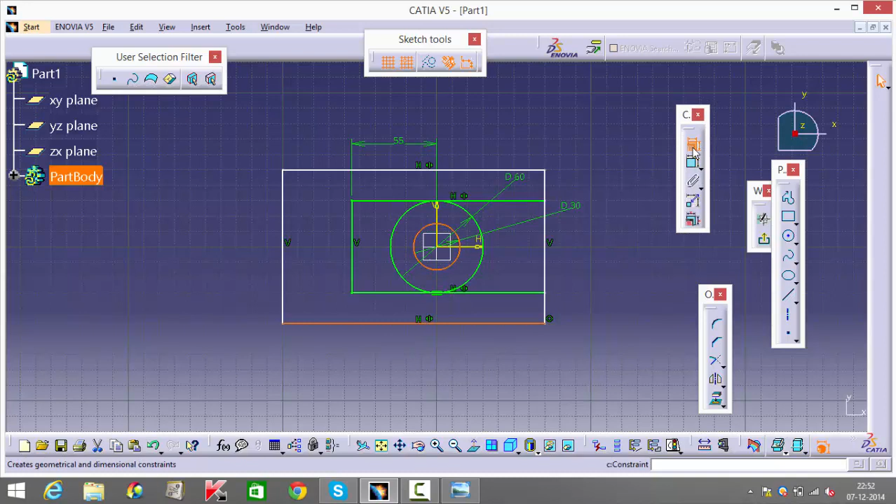Again, make both these lines symmetric with this, and now make it coincident to this -- I mean tangency to show tangency to that. Now I'm just going to trim the rest. Okay, and it's good.

So I'm going to go to my trimmer. I'm going to trim out all these portions. Okay, wait, hold on. Can you see it taking shape? Can you see this fork forming up?

Okay, now after this, what I'll do is I'll just draw another rectangle also and select that. Wait, I'll remove this -- that thing became constrained automatically, so that's why I deleted it.

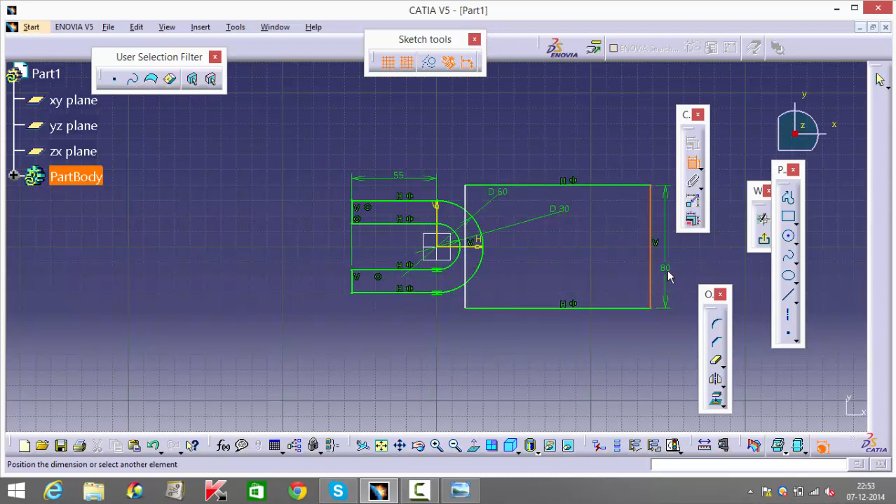Okay, so I'm just going to make that symmetric again, and I'll mention this distance as 30, because the breadth is given to me as 30, and this total length from here to here is given as 125, but I know that remaining portion is 25, so that means from here till the end will be 150, because 125 plus 25.

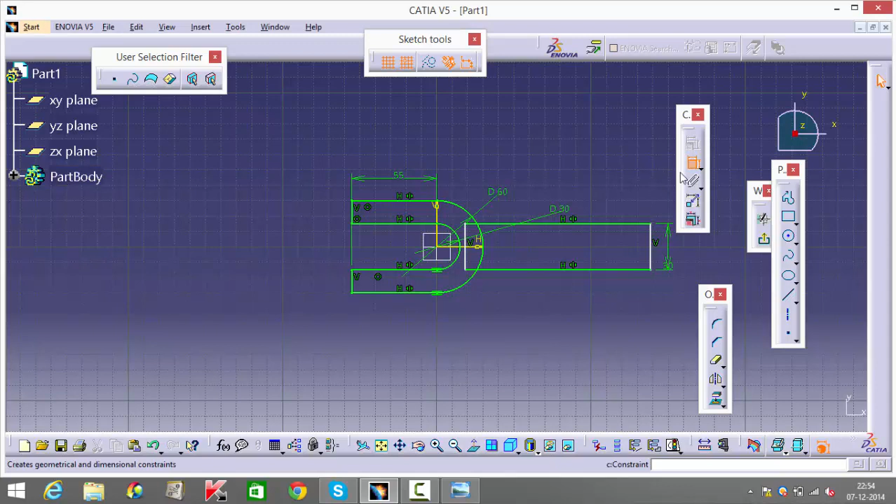But where are you going to position this? You need to put it -- it doesn't matter, because you're going to edge fillet this anyways. Put it somewhere inside over here and just trim off this extra portion. Okay, wait, first we'll give this distance. Select this end and that, and give it as 150.

Okay, now just push this back a little bit. Yeah, that should be fine. Okay, now you're going to go back. Oh wait, if we right now pad, it's going to say it's not possible because this is right now two separate bodies. You have to make it one single body.

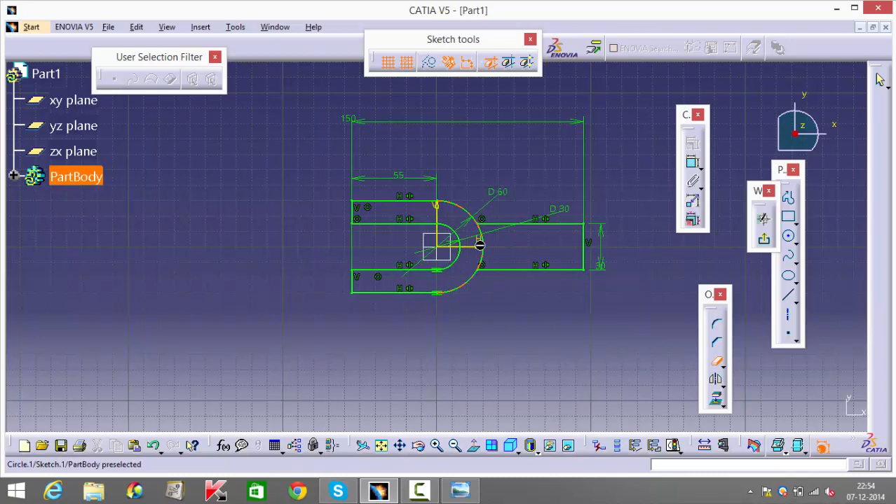So you're going to trim out this portion as well, this portion, and this. Yeah, now that's what you should eventually get. So this is what we want. Now we're going to pad the extent.

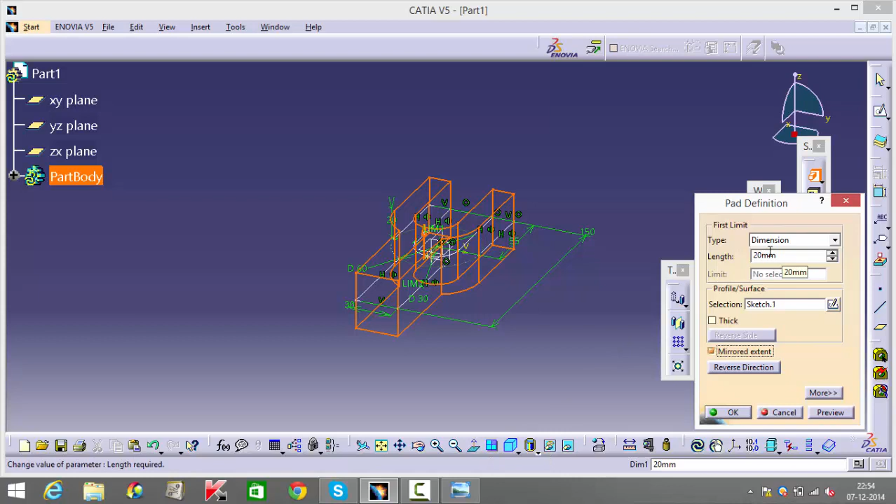You're going to pad this for -- one sec, let me just check. Okay, 30 itself. So since I'm giving mirrored extent, I'm going to give this for 15. Okay, so this is what we get.

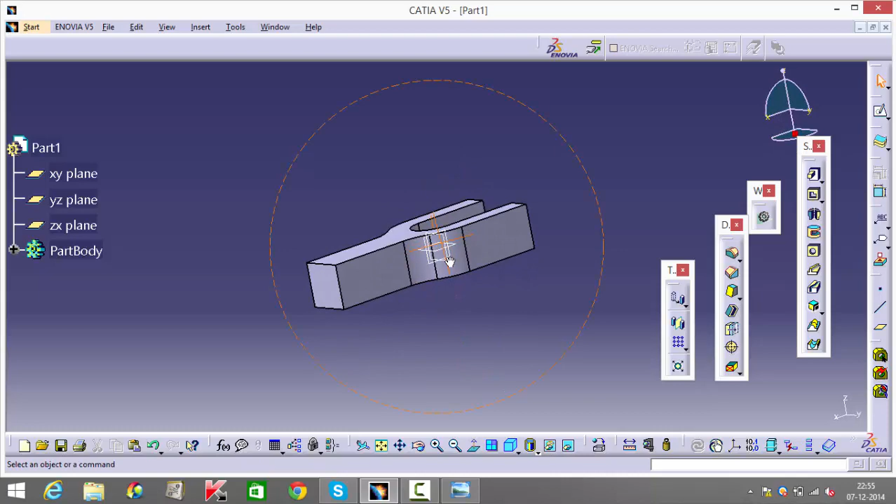Now over here, and over here, I'm going to give an edge fillet of 24 radius based on my textbook. So that's how it's taking shape.

Now I'm going to make this portion, okay, the circular thing. Now in my textbook I have an extra portion that's protruding outward. For that extra portion, I'm going to select this inner surface and go into pad. Now I'll draw my circle, give the diameter as 50.

Make this point coincident with that. Okay, it is coincident, and I'm not going to mention the distance, but I know for a fact that this distance is given to me as 30.

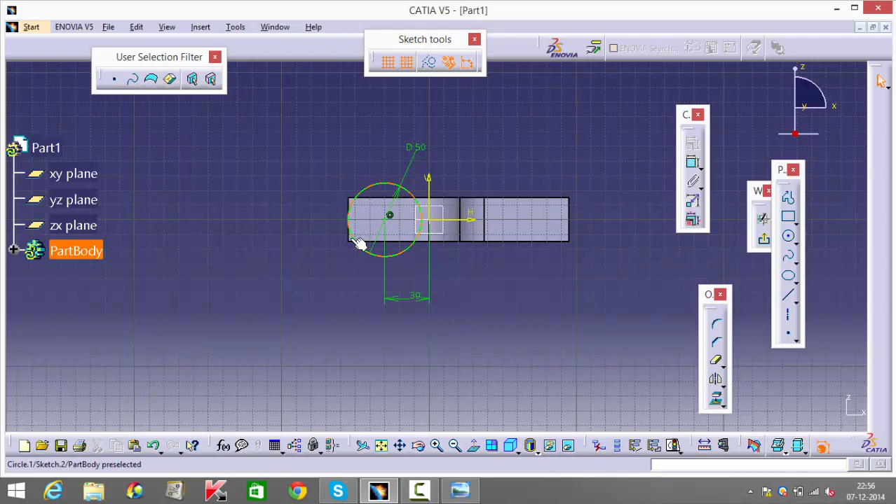Now I forgot to mention this earlier. If you pad right now, you're going to get an extra portion, but your figure doesn't look like that, does it? It's a proper circle. So let's first finish this pad, and then I'll show you what I mean.

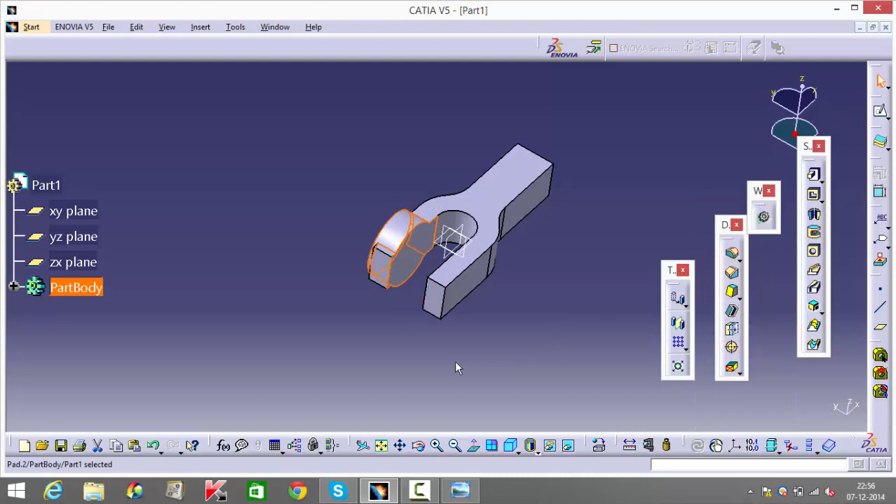So if I pad this now, I'm going to reverse the direction because I wanted to go that way, and give 17.5. Now see, this extra portion is what we shouldn't be getting.

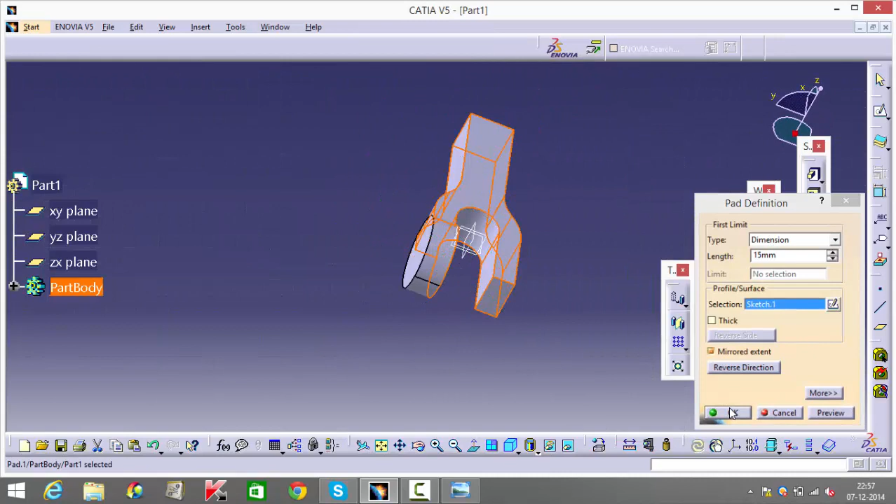So what you could do is go into your sketcher and change this distance. Don't make this 55, make it like 45 or something. So when I go back and press OK, now it's gone in, because now it's okay. You can see a few dots, but it doesn't matter. You can just change the dimensions accordingly.

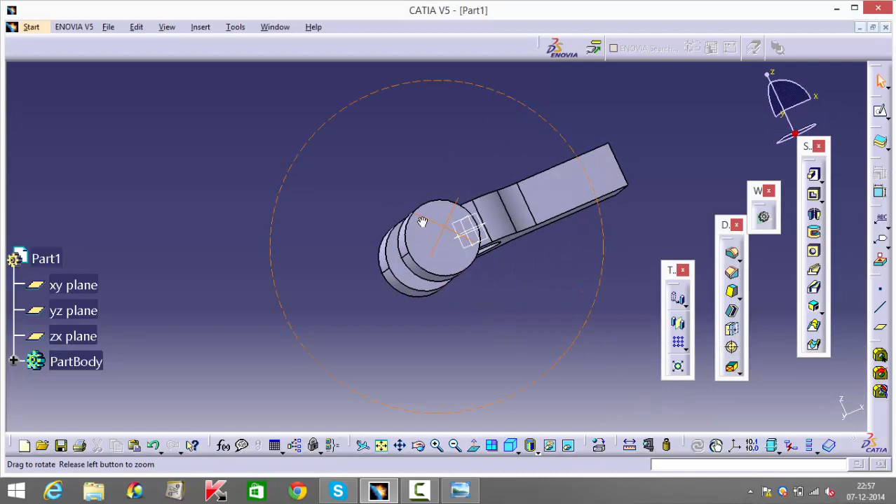Now what I'm going to do is make this symmetric. I'll select this plane and get it there, and you're almost done with the first part. I'll select this and this, and give an edge fillet of 24 again, as mentioned in the textbook. There we go.

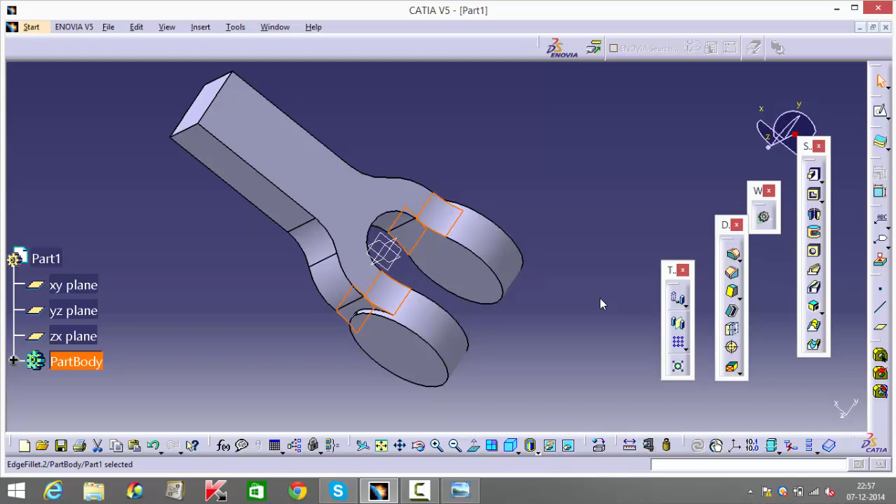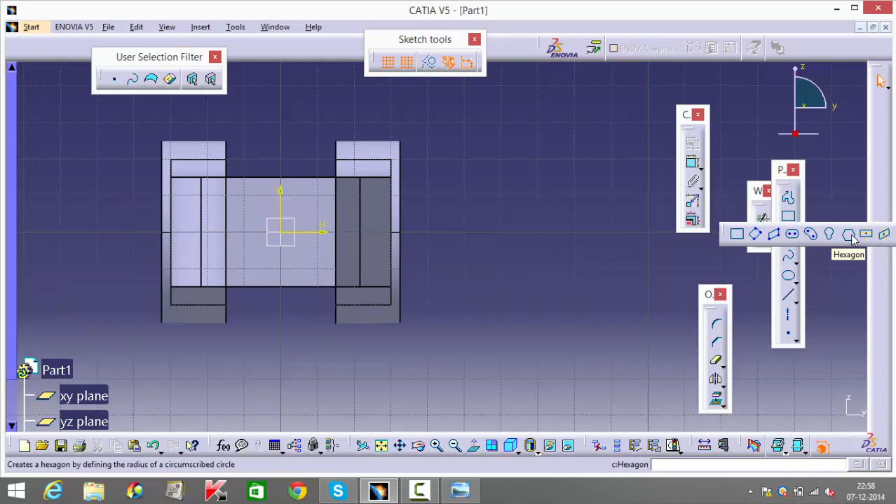Now to finish this part off, there has to be a hole that comes there, and we have to draw an octagon over here. I figured out an easy way to draw an octagon by using a predefined function, which is the hexagon. So you can start off by drawing a hexagon directly, upward. It doesn't matter, we'll mention the dimensions later.

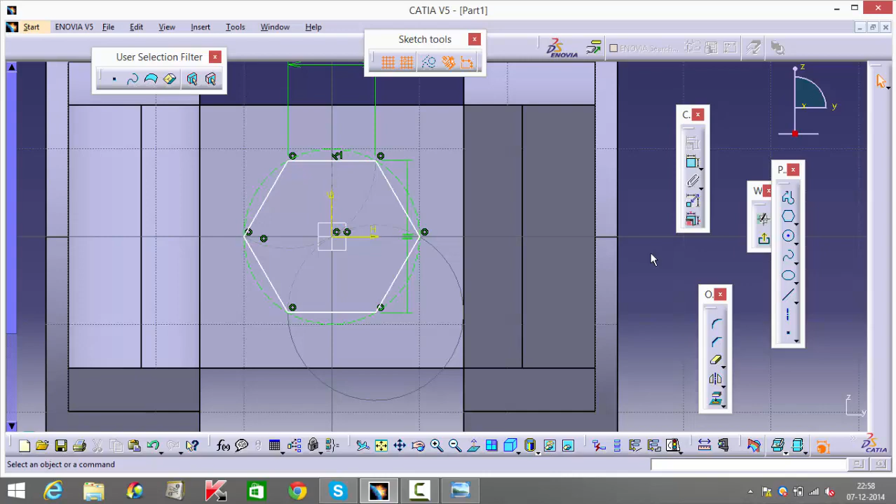I'm going to make this 10. It automatically constrains itself. Now if you notice, it's moving like this, so we'll have to fix that. Okay, but wait, we'll first... okay, don't mention this as 10.

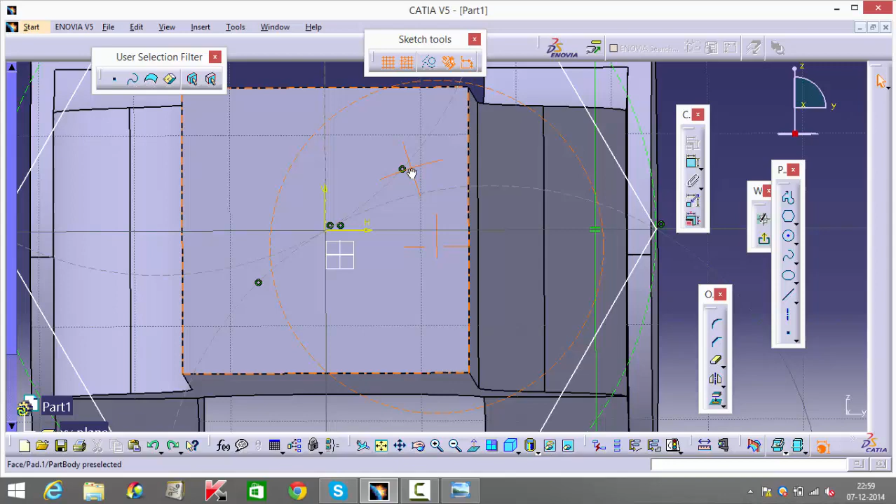What you do is take a straight line and first start off by drawing a straight line. Draw it big, it's not a problem, we'll fix it later. So I'm just going to draw a straight line like that, drawing it in such a way that it cuts the corners.

So I'm just going to mirror this with respect to this plane. Now I'll get my trimmer tool. What I'm going to trim is this portion, I'll trim these edges. And you're getting your octagon. It's as simple as that.

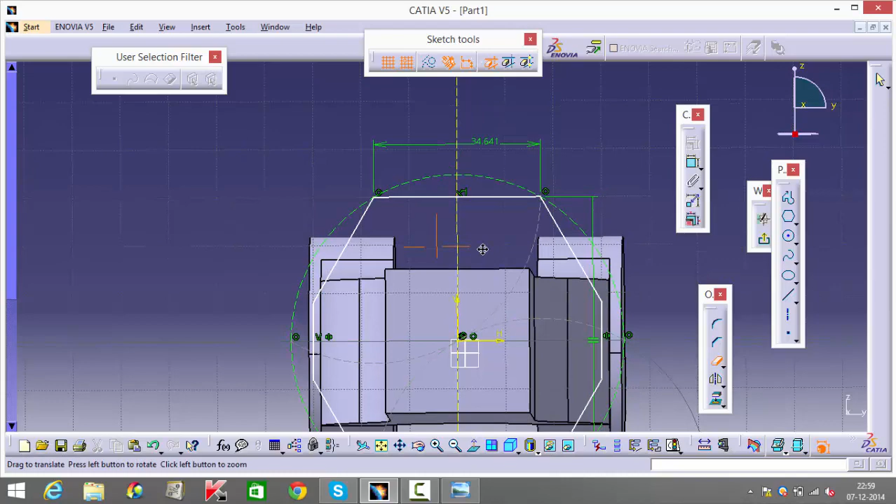Now you have to remember this: if I mention these dimensions right now, it will go in a way we don't want. So what you can first do is make both these points symmetric to this axis, so when we give this measurement, it distributes itself evenly. Do the same for the other side.

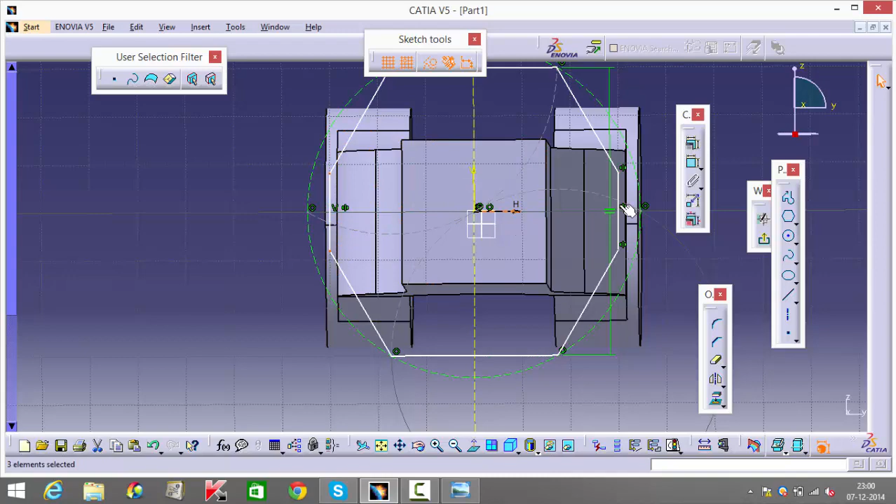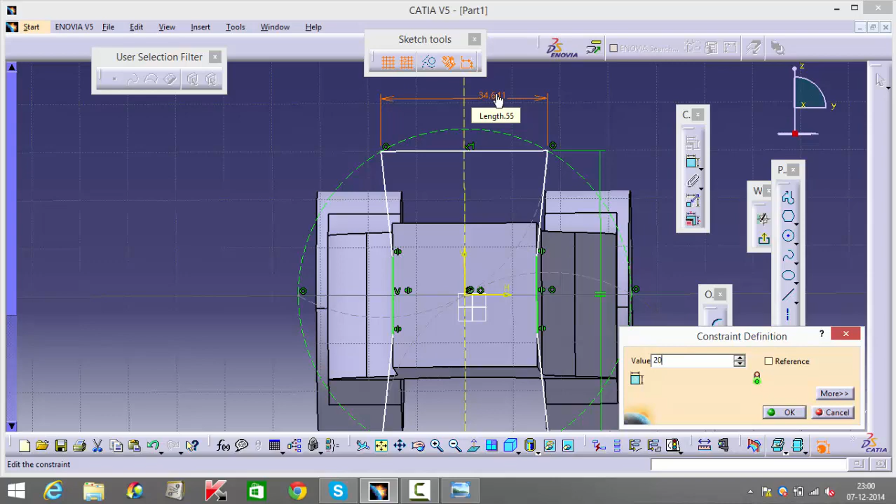And now what you can do is make one end coincident, and you can mention this as like 20, it doesn't matter. Now make the other end coincident. Okay wait... yeah, you don't need to mention that dimension, it's okay.

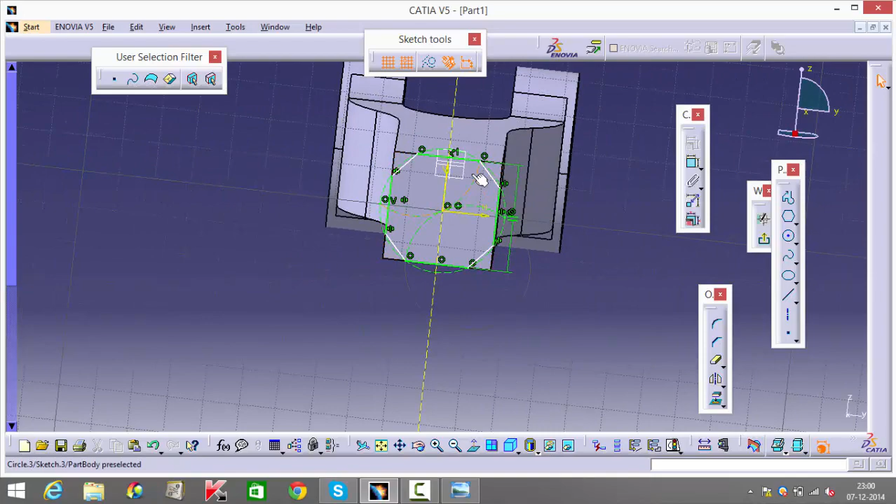What you can mention is how much you want this to be. I usually give 10, but it doesn't really matter. Whatever measurement you're giving, give the same for the other side.

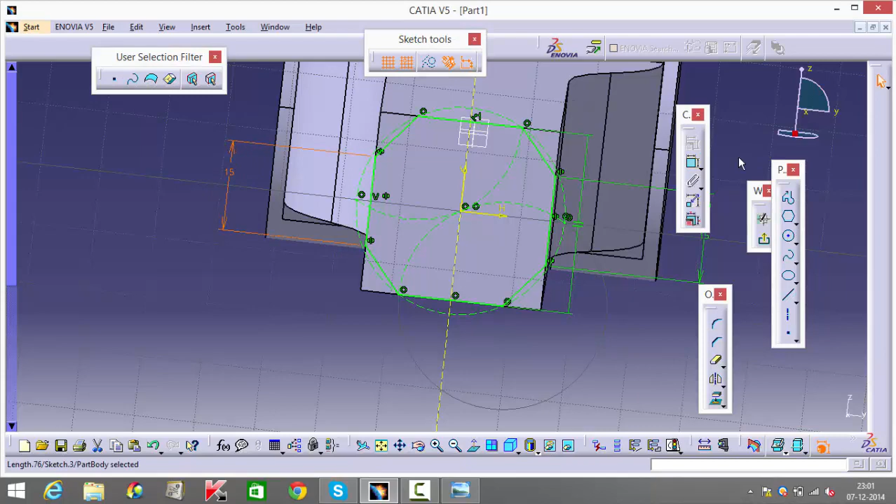Now you're going to pocket this. If you have to, reverse the side and pocket. In my textbook it's mentioned to pocket to 37.5, so I'll pocket to that. And you get this, this is what you want. So this is the first part done.

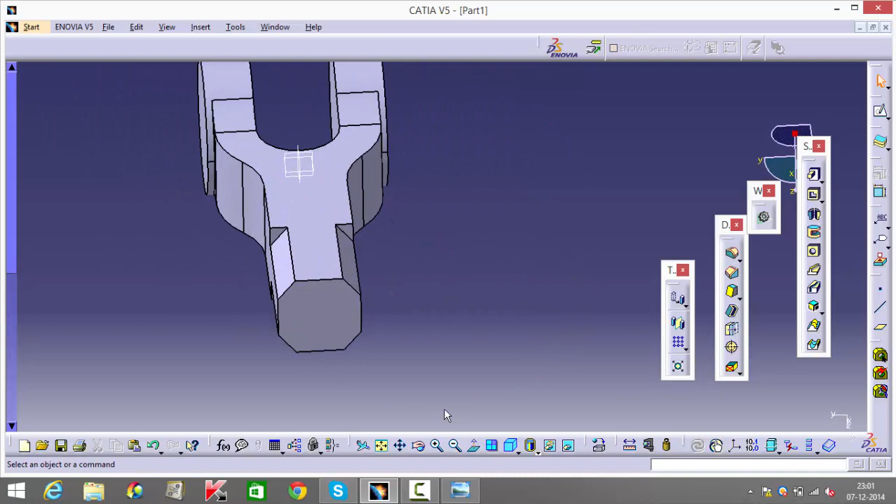30 minutes, okay, fine, we'll finish it. So I just go into my hole definition, make sure that's in the center.

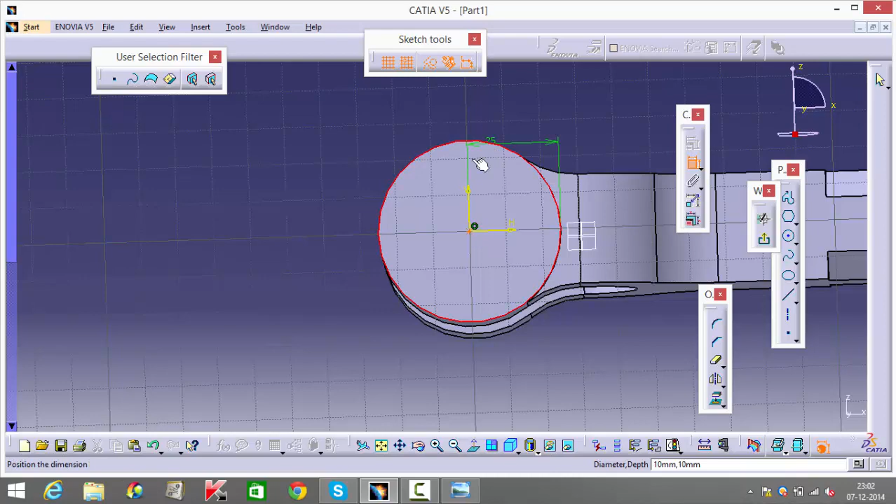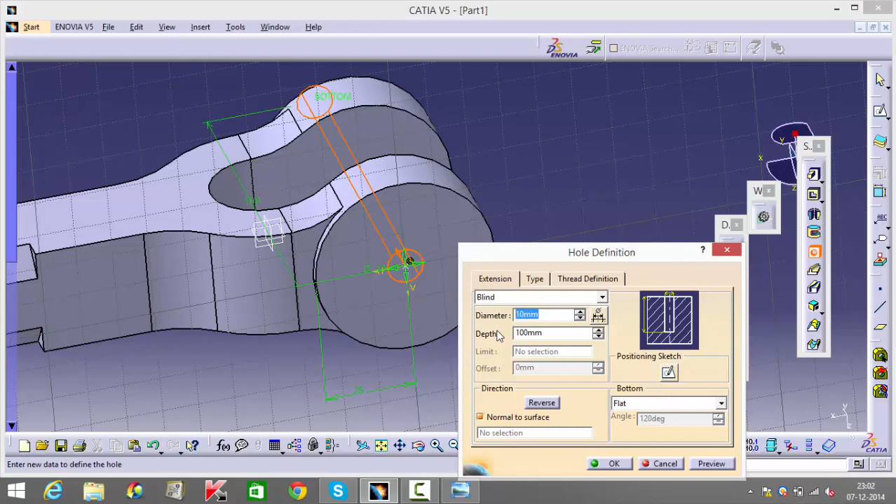Okay, and the pocket is for 25 as well. Depth 30. Okay, I'm just going to give 100 because I want it up till the end. And this is 25. So that's your finished knuckle joint part 1.

I'll start with the second part now. The second part is also very simple, it's plain. So what you can do is just draw this rectangle first. You'll be done with this in a few seconds, just draw a rectangle.

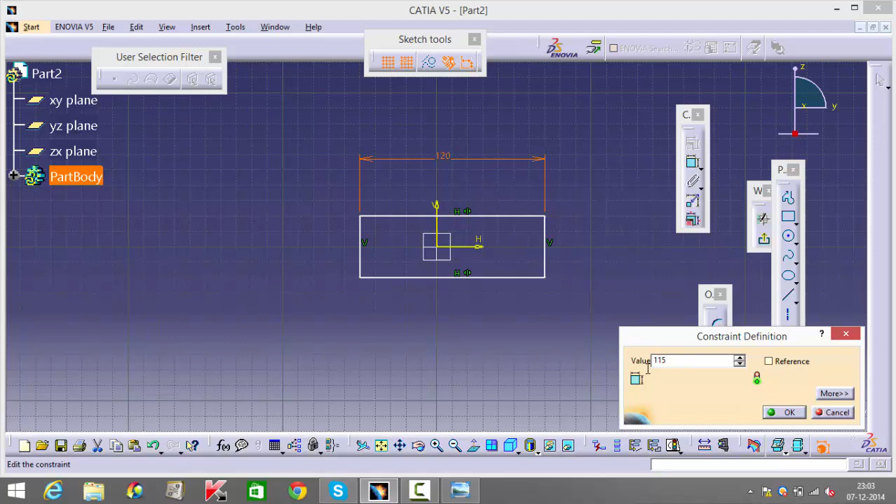So I'm going to give 115, and then I make again these two edges symmetric. Then this distance is mentioned to me as 30. Now I'm just going to exit my workbench and give a pad, again this pad is also mentioned as 30, so 15.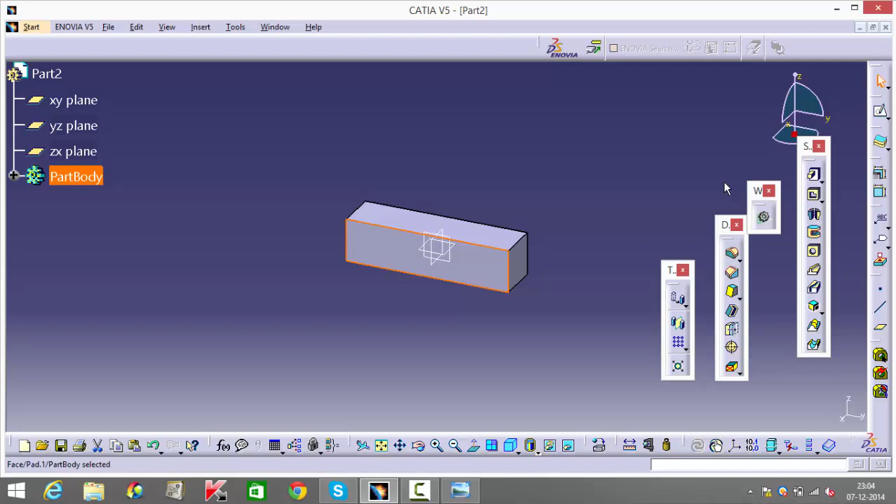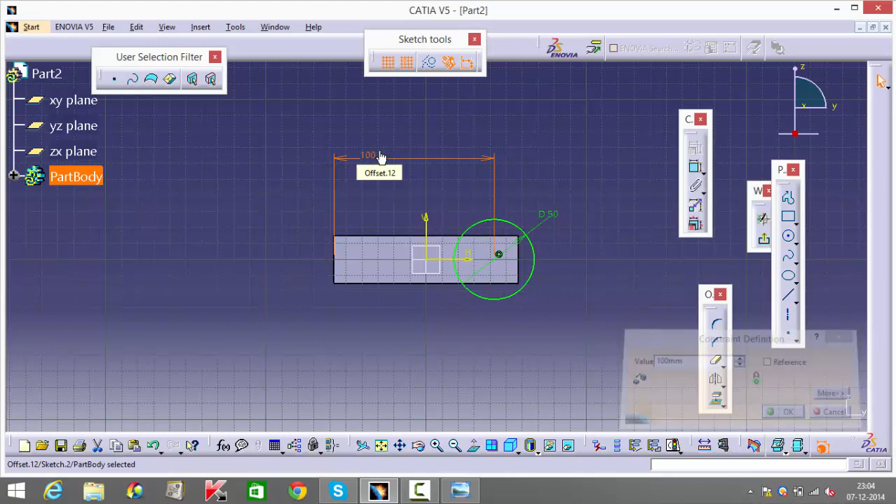Okay, now I'm just going to select this portion, and now I'll draw my circle. My circle distance is given as 50 at the diameter, and again, since the center to here is mentioned as 100. Now see, that extra portion lies within the circle, so when we pad this it's hidden. So I'll pad this, reverse the direction, pad for 30, and we'll get that.

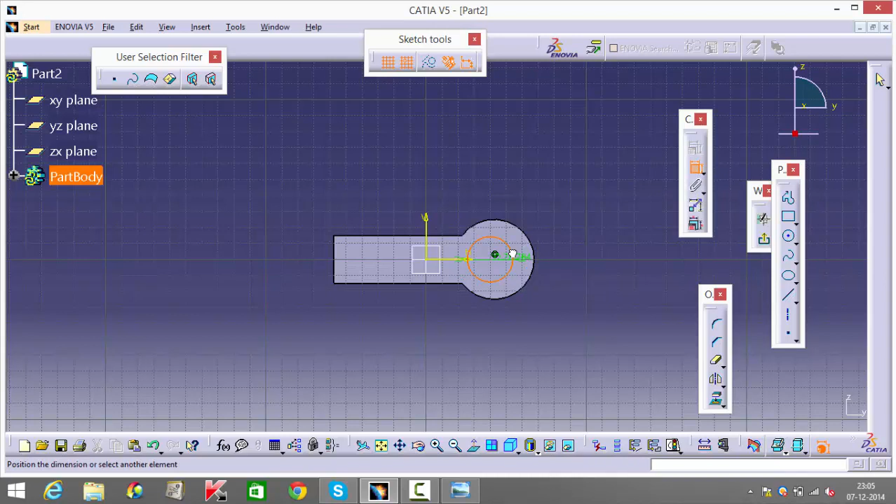Select that again, just make a circle for the hole, or you can go into your hole definition, it really doesn't matter. This is given as 25, and again this is mentioned as 100.

Again, I'll go back and pocket this, 30 or up to last, won't matter. Okay, we're almost done with this.

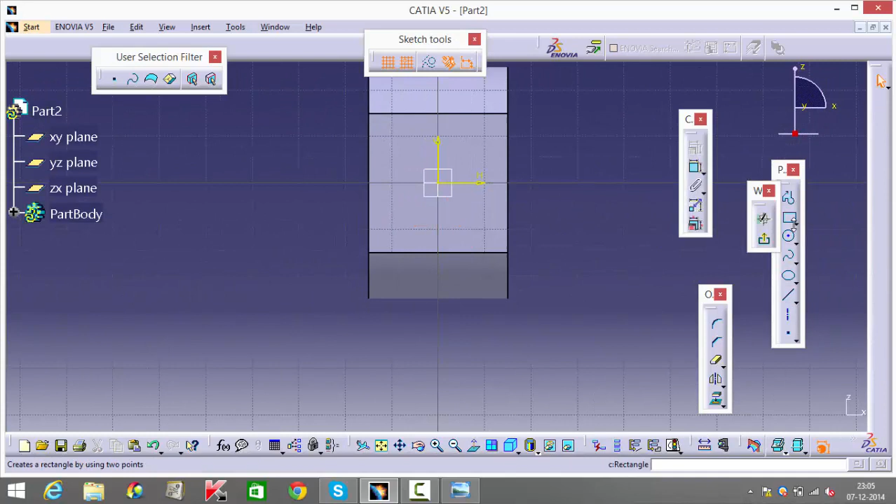Select the surface, and the same way how you made the octagon for the previous part, you'll do the same thing over here, just make it a little big. Then you draw these straight lines, you can just mirror this, and then go into your eraser tool and delete these edges.

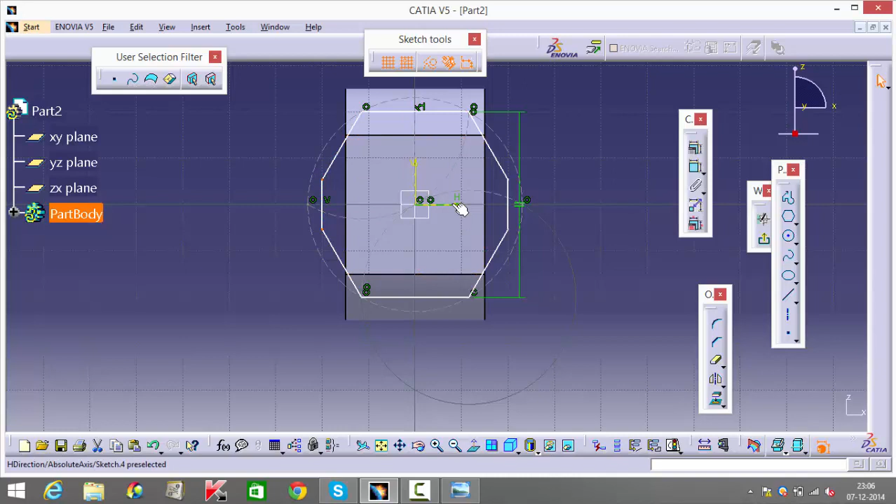Okay, then same procedure, make these symmetric. Similarly this as well.

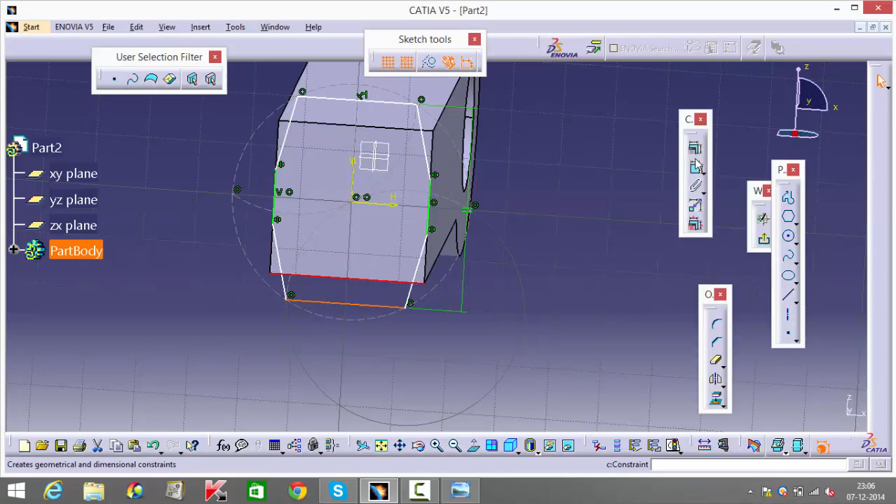Then you can start off by making one of these ends coincident. There you go.

Okay, and what's happening? Yeah, and then you can mention this as 15. Same thing you'll do for this side.

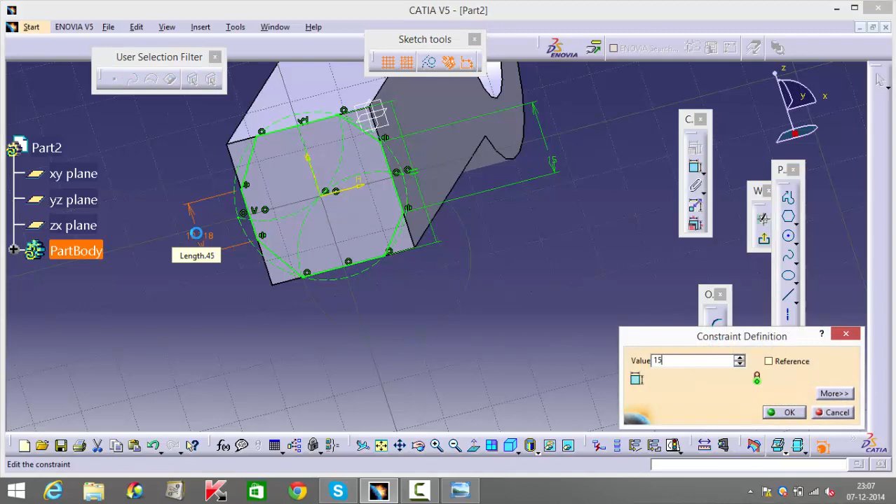Okay, and then you'll exit your workbench and again pocket this. Reverse side 37.5. Yeah, and there is your part 2.

Don't forget to give these edge fillets. I forgot to do it for the previous part. It's fine, make sure you don't forget to do it.

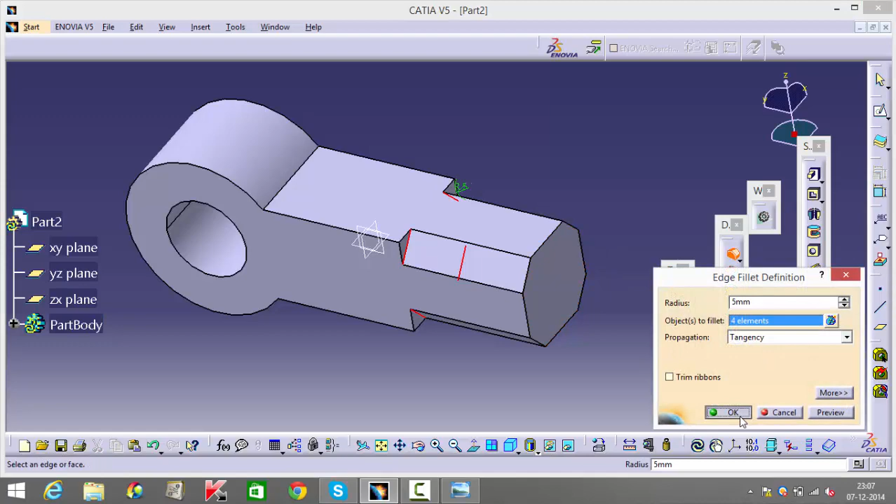And this, you can edge fillet this for 5. Okay wait, probably give like 2 or something, it's because this thing that I mentioned was too much, the hexagon that we drew.

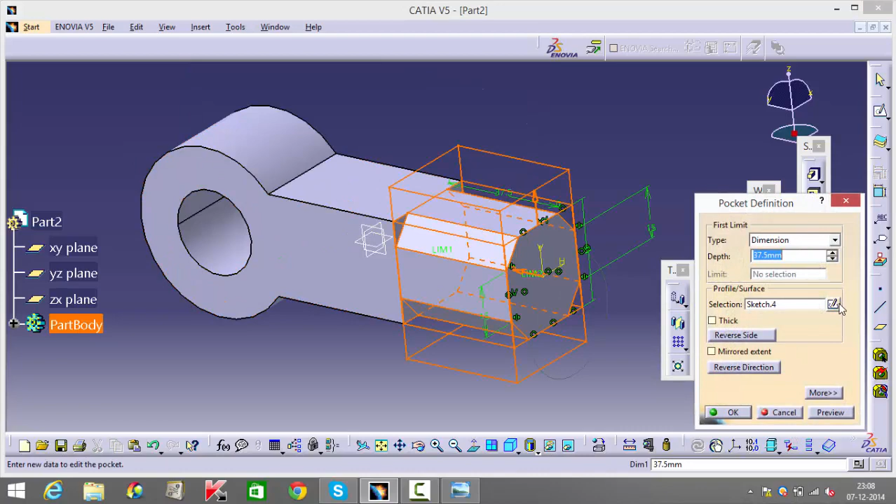So probably if I make this, whatever readings you give for this, make sure you give it the same to all. So now if I give, okay it just changes its orientation a bit. If I give 5 now, it'll be fine.

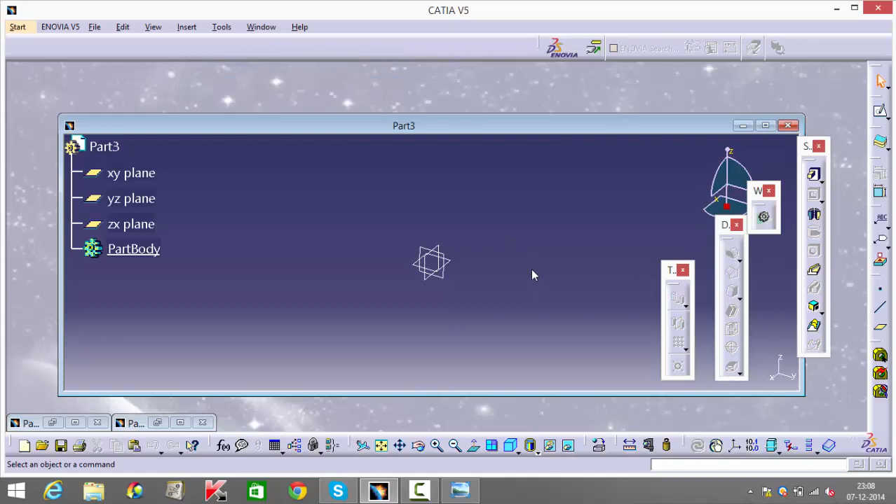Okay, so this is part 2, part 2 done. The rest is very simple. This is part 3 now, we're going to make this portion.

Okay, quickly. I'll just go into my... actually I don't need that, I can draw freehand, I can take the profile tool itself. I'll just make a shape like this.

And this total distance is given to me as 38, but since I'm going to shaft this, it's basically going to be half, so I'm giving 19.

Push this up a little bit. And this is given to me as 25, so okay, so it's a 25 dia, but since I'm doing shaft, it's going to be 12.5.

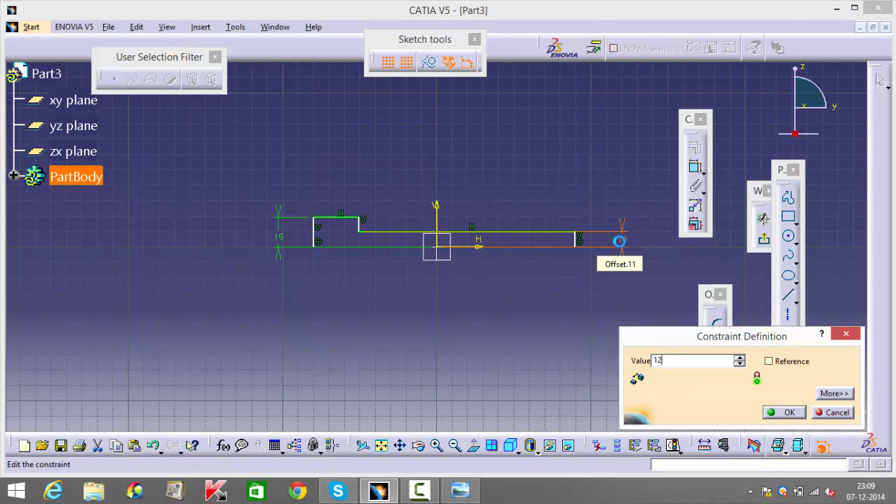And this distance is given to me as 10, and the rest is given to me as 82. So from here to here is 82.

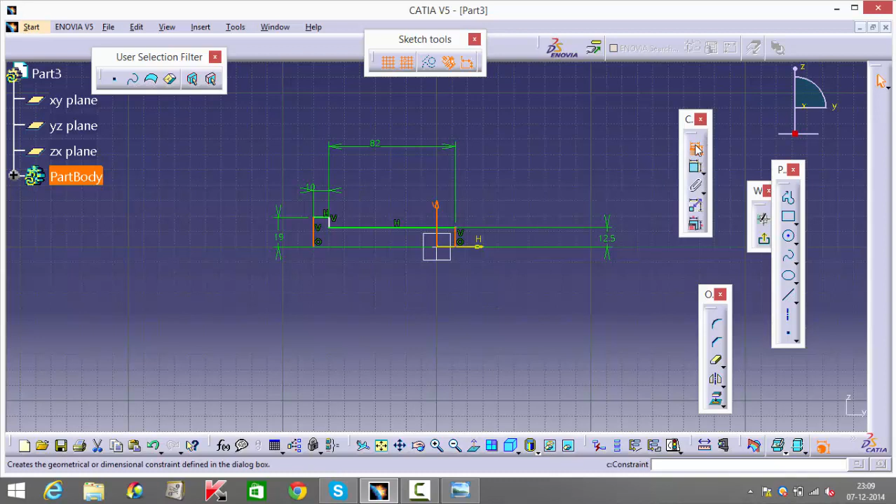Okay, now we're just going to make both these ends symmetric to this. It doesn't matter if you're very bothered about making your figure completely constrained, then you can proceed with that. Okay, then we're gonna just shaft this, and you'll get your bolt.

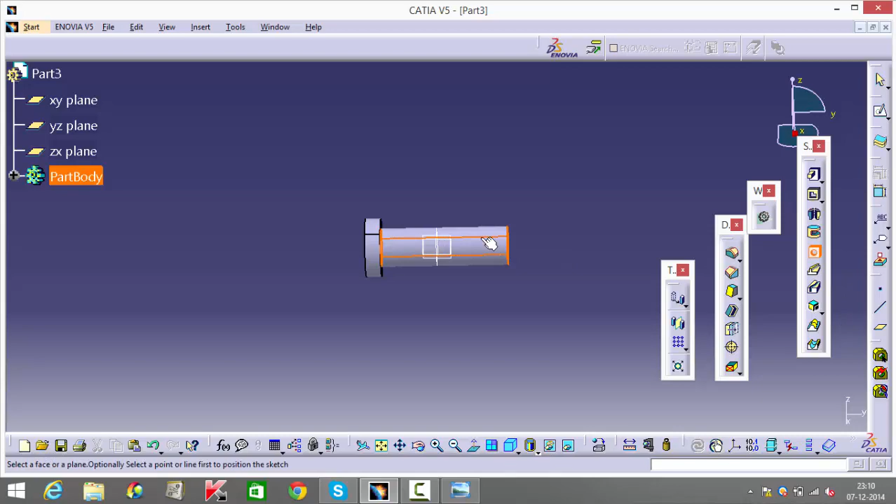You have to make a hole over here on this surface. You can either go into your hole tool and select the surface, or you can also select the plane and go into the sketch. So I'm just gonna constrain this hole.

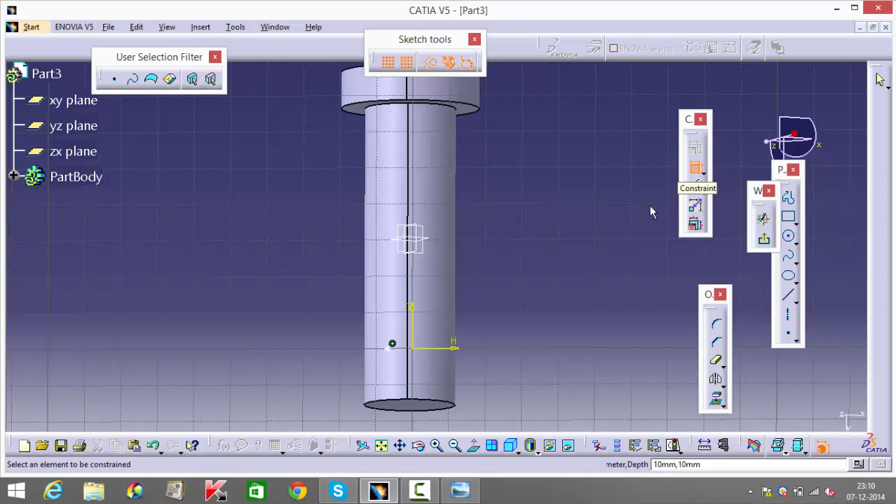I mean the hole itself, so I'll make it first coincident with that plane, and then I'm gonna give this distance as 11.5 as mentioned in my textbook.

I'm gonna go back, and the diameter is given as 5, and the depth you're gonna give it for 25 because it has to go all the way through, and that's it, so that's that part.

2 minutes, okay, and you have remaining 2 parts. We'll make the washer first. It's again very simple, select that surface and go into your sketcher.

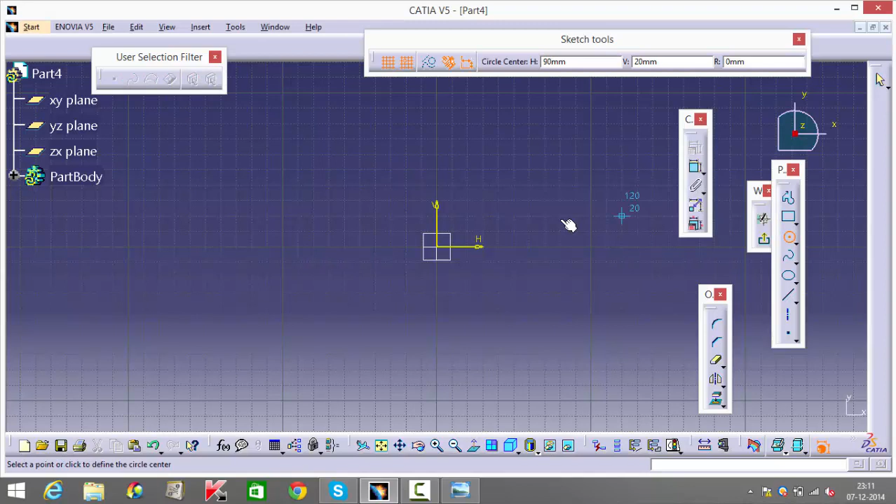It's basically 2 circles, that's it. You're gonna constrain this as 25 and then 38. 25 dia, 38 dia.

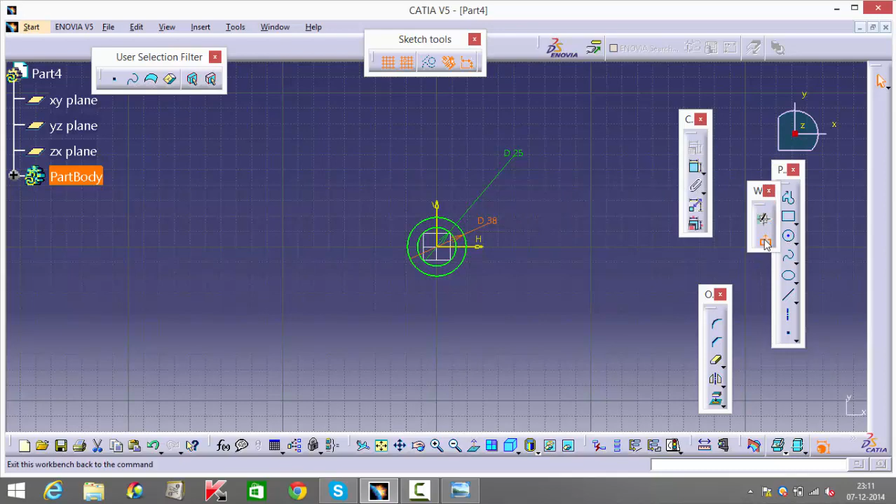And that's it, you can go back, pad, mirror. The total distance is given as 10, so 5. Again, over here you have a hole that goes through.

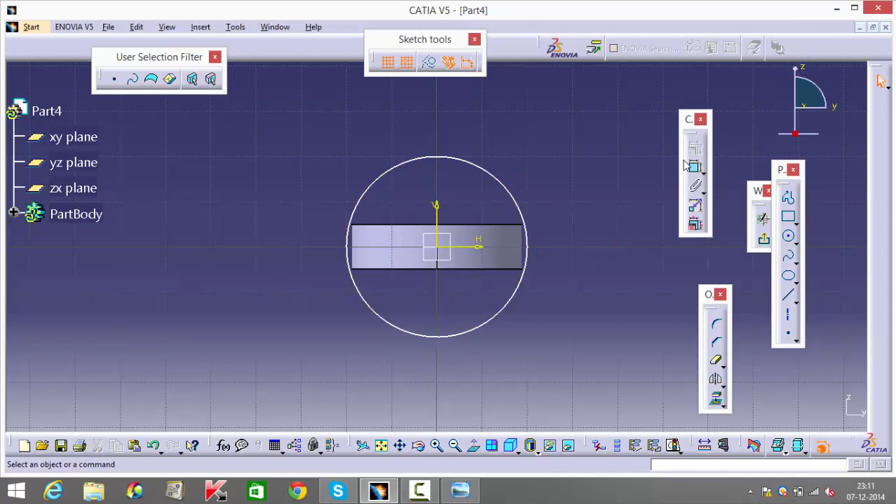So you can either select that surface, or actually I'll show you the other, or you can select this plane and go into your sketcher. Then you draw a circle, and this is supposed to be 5. And you can go back out and pocket.

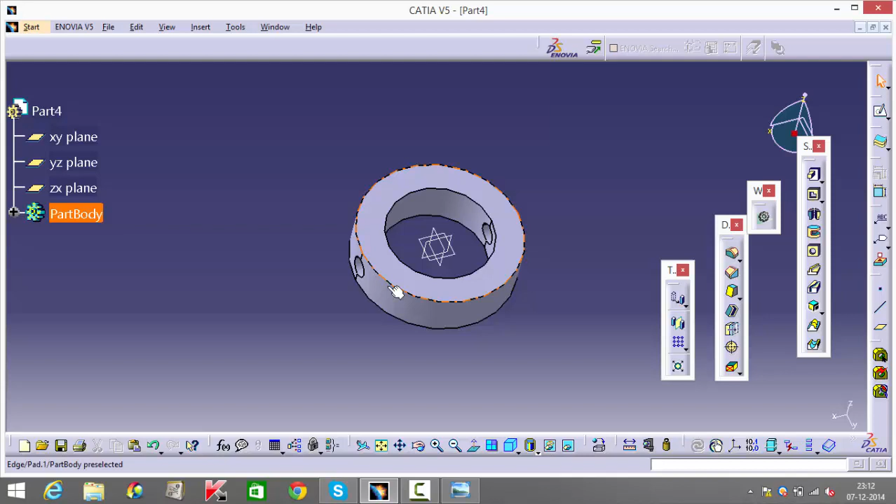Now you're gonna give mirrored extent and give this for like 50 or 25, so it passes through the whole thing. Or you can give it, the distance should be anything greater than the outer diameter, or the outer diameter itself. It doesn't matter, yeah, so that's done.

Your final thing is the pin, so you can go again into your part design, and this is also a simple shaft. So select the, just make something similar to how the pin looks like. Make both these ends symmetric.

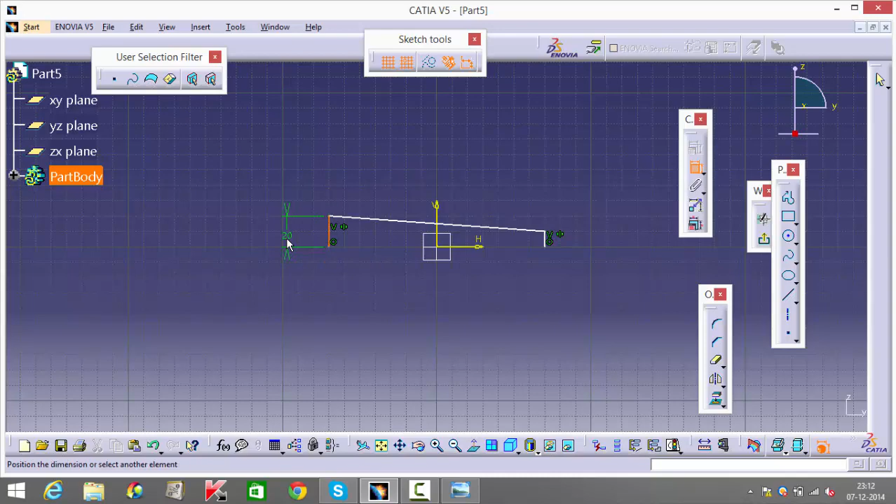And the ratios are mentioned as 1:50, and they mentioned this distance as 6.5. Since you're doing 1:50 ratio, by doing the calculations you'll figure out that this end will be 5.5, since you're making a tapered pin. And this total distance is given as 44. That's it.

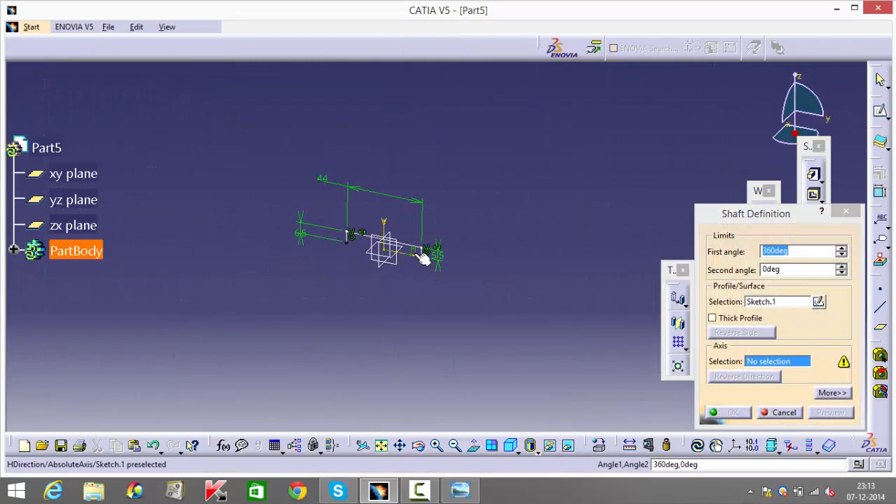Now you're just gonna go out and give your shaft option again. That's it, and you're done.

Oh wait, hold on, it's too thick. That's because you're gonna take half of these because you're shafting the option, so it's 5.5 by 2, and this will be 6.5 by 2. Yeah.

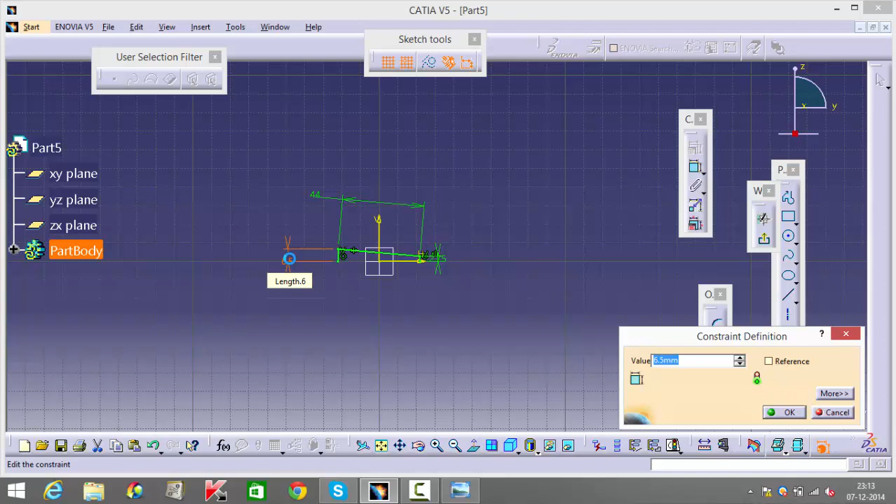Go back out, just press OK, it'll update automatically. There you go. Now this is of your dia, this is of the required dia now that you need.

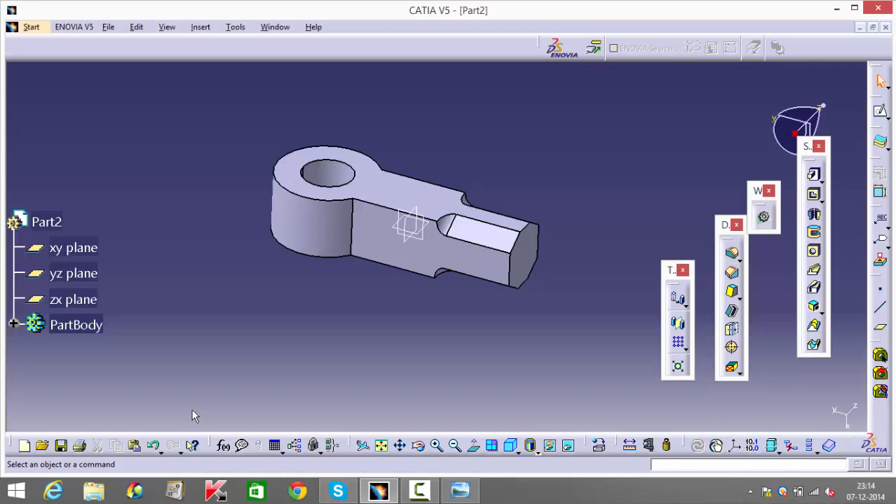So these are your parts. This is part 5, this is part 1, your part 2, part 3. No, this is your part 4, and hold on.

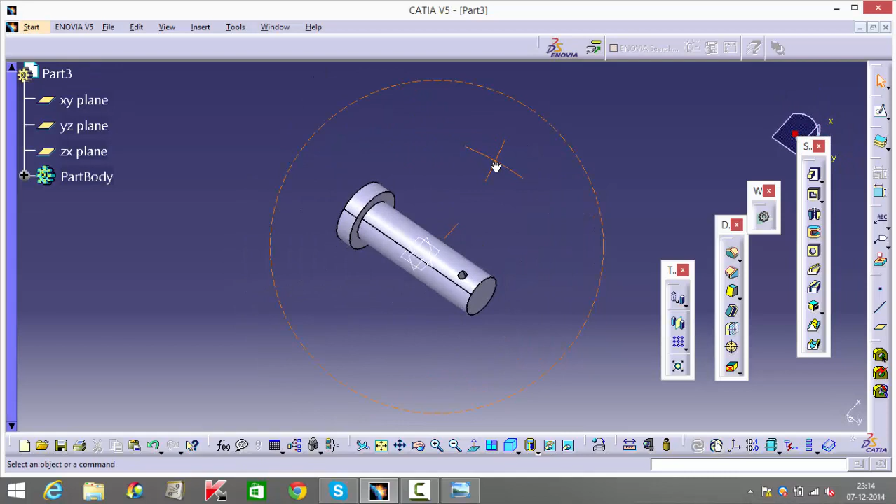What the hell, okay sorry. Yeah, this is your bolt. And that's all the parts that you need for Knuckle Joint.